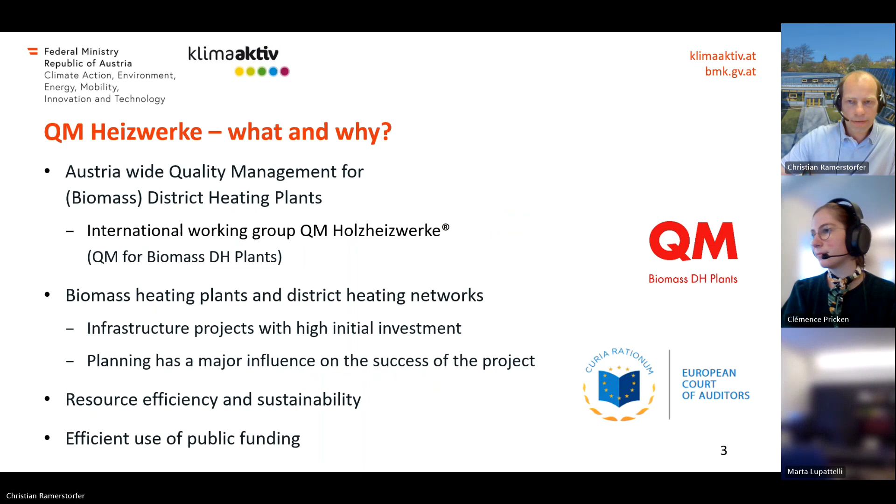So you prefer that we change the slides or that you do them yourselves? Yeah, if it is possible, I would do it myself. Mhm. Good morning. Hello. Good morning. Should we have a try on that? Yeah, sure. If you wanna try to share your screen. Yeah, should be no problem. So now it is in full screen and working, huh? And presentation mode, next slide. Indeed. Yes. Everything okay? Okay. Indeed.

Yeah, then I think it's more efficient to do it this way because there are a lot of slides and hopefully I can keep time, but yeah, let's see. Thank you very much.

So we are only two today, Christian Holter and I. Yes, because while we were organizing this session, we realized that having such a focus on heat pumps, maybe it would have been better, for the sake of completeness and organization, to organize a second session, like 2.2 on heat pumps as a case study. Okay. Yeah, it's okay for me, of course. Would you like to take part in this session 2.2 as well? So we can send you the invite. Exactly.

Yeah, why not? When is this going to be? We have to decide between two dates. It's either the 30th of November or the 21st of December. But I think we will go for the 30th of November. Yeah, would be possible. Please forward the appointment to me, and I will have a look if it is possible. Definitely interesting, of course, also for us because we are also dealing more and more with heat pumps.

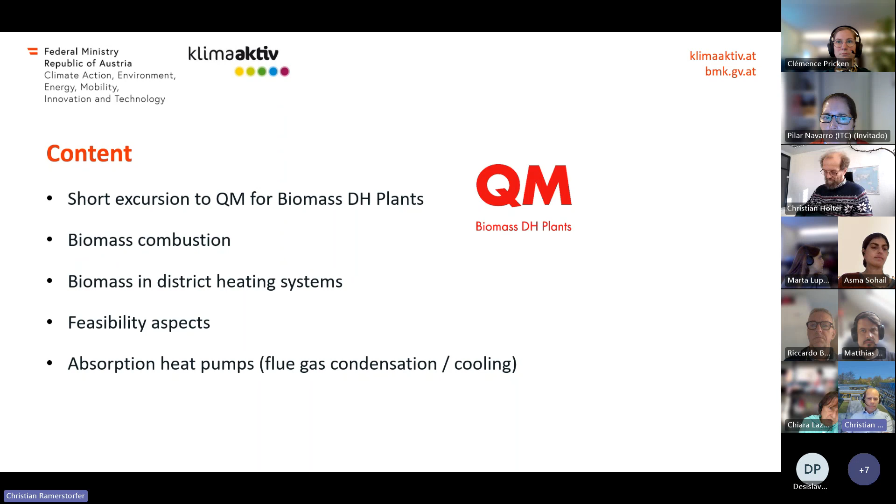So, this short excursion to QM. What is this? In Austria we have QM Heizwerke. This is an Austrian-wide quality management for district heating plants under the umbrella of an international working group called QM Holzheizwerke, or in English QM for biomass DH plants, which deals with biomass heating plants and district heating networks. It was designed because biomass heating plants are infrastructure projects with very high initial investment, and planning has a major influence on the success of such a project. Some mistakes were made in the past, and QM tries to ensure resource efficiency and sustainability, and last but not least, efficient use of public funding if public money goes into such projects.

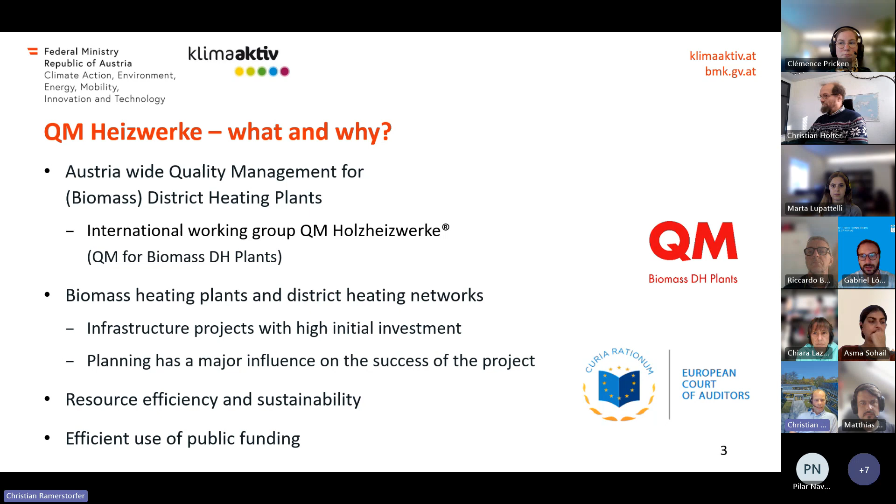So who invented this? It was initially made in Switzerland since 1998. Since 2005 it is also done in Austria and Germany, in Austria by this Klimaaktiv program Heizwerke und Wärmenetze. Since 2016 it is managed by our institute. And one success of this Interreg Central Europe project N-Train is the participation of Italy since 2020 in this international working group.

The most important literature within this publication series, which I will refer to a lot in the presentation, is the QM Planning Handbook, now available in a third completely revised edition from 2022, so really new. For the district heating network itself, there's also a handbook on planning of district heating networks from Verenum in Switzerland, which the planning handbook often refers to. On the technical side, for hydraulics and control, there are the standard hydraulic schemes or standard hydraulic solutions, another document dealing with that topic. I will come to the planning handbook a lot afterwards, so enough about that for now.

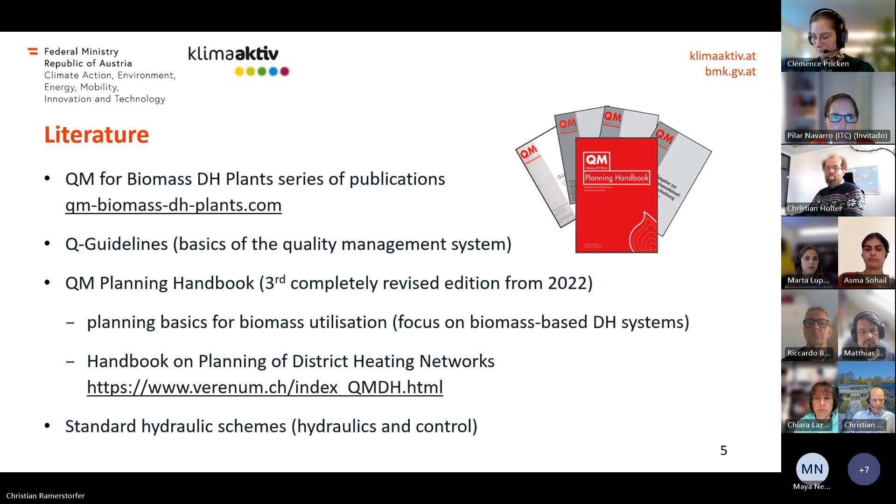What is also important to consider is that sometimes instead of the water content, the moisture content is given, which has considerably different values. Water content is on a wet base, moisture content is on a dry base. So be careful which of these two values is really given.

Another very important thing is that the combustion system or the firing system always has to match the biomass type or also the quality of biomass that should be used. So different types of biomass need different types of firing systems.

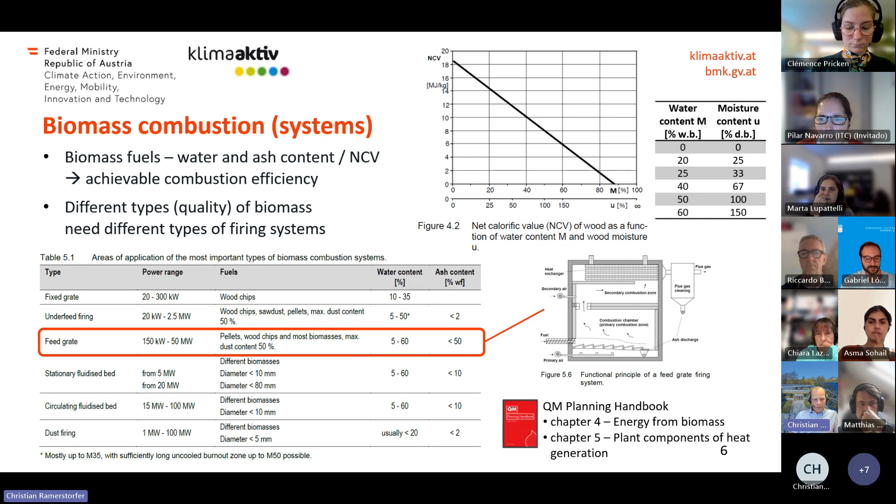Whereas for district heating systems, there's not only this boiler system, but also the district heating network, of course, and this turns out to be a multiplication in efficiency. So if we have 85% annual efficiency of the biomass boiler and 90% for the district heating network, which would be target values according to the QM system, then we see that the overall annual efficiency of such a district heating system is 76.5%, so considerably lower than decentralized boilers.

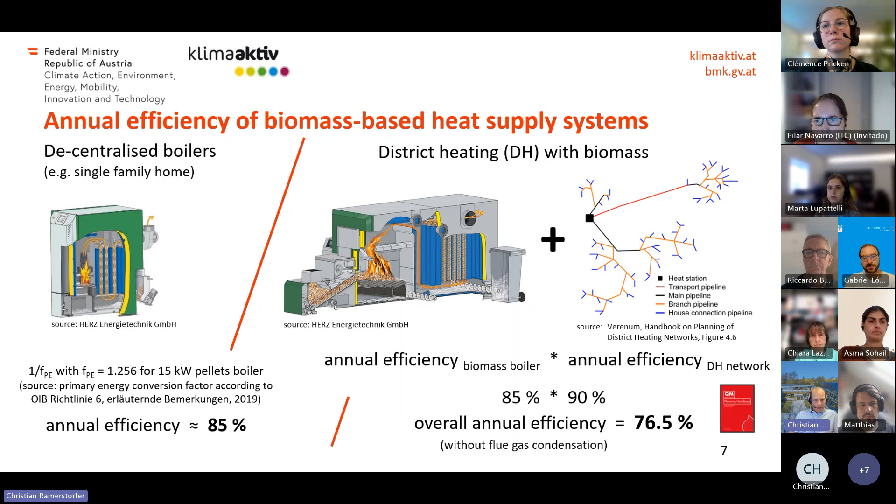Of course, for a boiler that has no flue gas condensation. But in the first step, one could ask, why should we do district heating then? There are reasons, of course. One argument is often customer convenience, so low space requirement, for example, and being carefree for the customers. But of course, there are also other very important arguments. So flexibility and resilience is a very important topic here.

It enables waste heat utilization on a large scale, also for single family homes and so on, which cannot be done with another technology than district heating. It also enables integrating other renewable energy sources like solar thermal and geothermal. About solar thermal, we will surely hear something in the next presentation.

And especially for biomass, there are a lot of advantages to doing this via a district heating system. First of all, it enables it to be locally emission free at the customers, so only emissions at the central heating plant, and there with monitored emissions. Then it is possible to have reduced start-stop and low-load operation of the boiler due to a better distribution of the heat demand in the network, so simultaneity of the heat demand.

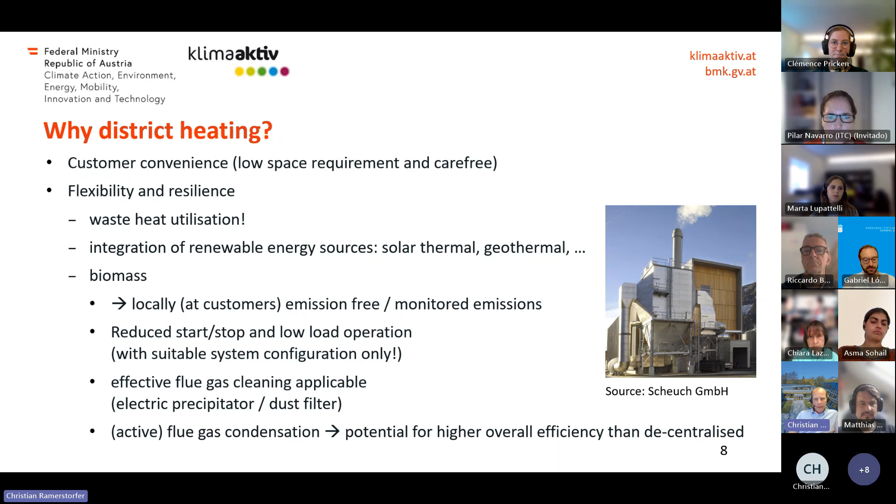Then effective flue gas cleaning is applicable, for instance an electrostatic precipitator, as you see in the picture here. And it also enables integrating flue gas condensation or even active flue gas condensation. I will come back to that later. This gives the potential for a higher overall efficiency than these decentralized boilers. So a lot of arguments to do it via district heating, but of course there are special needs for such systems.

Biomass heating plants are very complex systems. Not only heat pumps, I would say, are complex, but biomass heating plants are also rather complex. And biomass boilers have very different needs than, for instance, natural gas or oil boilers. There's a considerably increased space demand for all the additional components needed, especially for fuel handling and storage, the firing in the boiler itself, the ash system, and so on. So one has to consider that.

Then there is also an increased complexity of hydraulics and control, and also of the safety equipment needed. There has to be a boiler return temperature protection. Control of the firing and boiler is maybe more challenging than for a natural gas boiler. You have to think about how to control the boiler; QM says here, according to the charging state of the heat storage tank. These are topics shown in these hydraulic solutions, things like thermal discharge, safety devices, and so on.

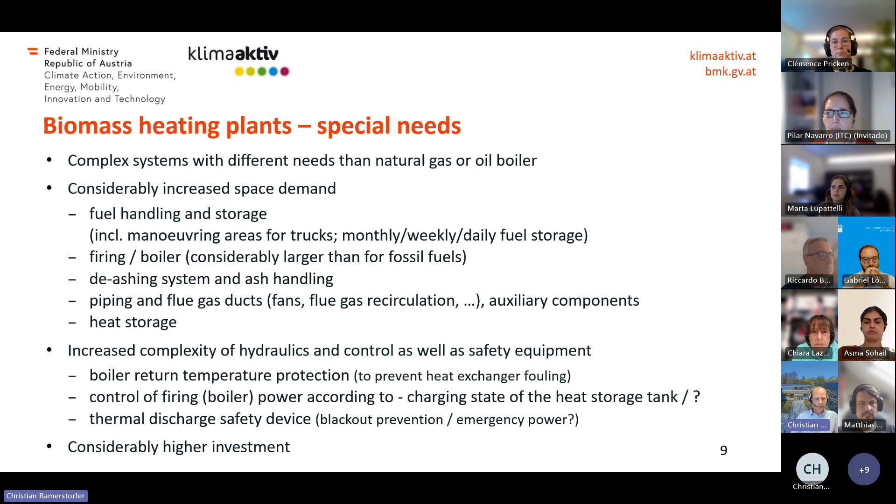So all in all, all these increased demands also lead to a considerably higher investment, but more on feasibility later on. So how does this look? A basic biomass plant configuration you can see here. You have this fuel storage, a push floor in this case, which is, as you see from the space requirements and conditions here, really different from a fossil fuel based plant.

Then there's the firing and the heat exchanger or boiler itself. Most commonly we talk about the boiler for this whole unit, so firing and heat exchanger is the boiler.

Then there's also a first step of flue gas cleaning already included in this boiler. It's really standard to have this multi-cyclone in there. Maybe a second step, electrostatic precipitator or baghouse filter for flue gas cleaning, the chimney.

All this ash conveying container system, control cabinets, of course. Also a heat storage, which is always recommended by QM to have in combination with the biomass boiler. And a lot of components that are not shown here, like hydraulics, pumps, fans, and so on. So you see, it's really complex and more is needed than for natural gas boilers, for instance.

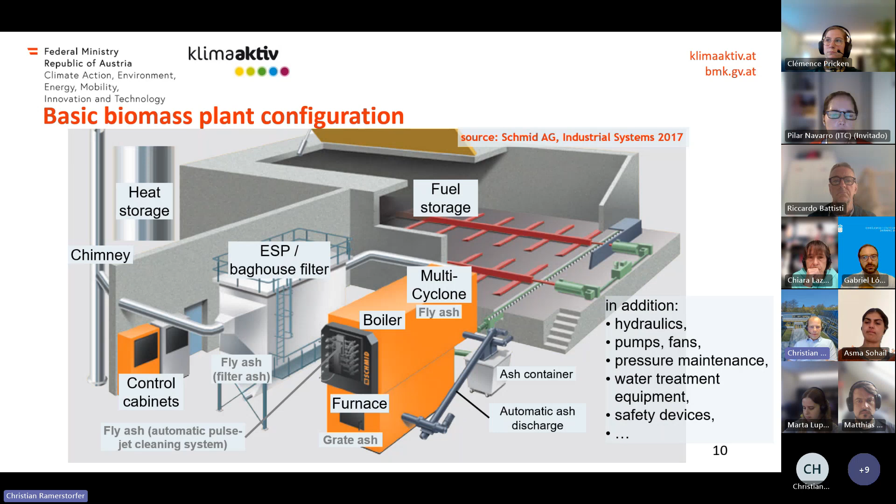So if you want to design that, I tried to sum up some principles according to this quality management system that should ensure low emissions and at the same time efficient and feasible operation if you follow these principles. So QM says most important is to have a matching firing technology to the fuel quality, as already said, and a really profound planning basis for design.

So you have to be sure to know the actual situation of the total heat demand or heat output demand, and to design the whole plant to these needs. So to have a very clear picture of the overall concept, how the plant and the boiler should be dimensioned, with hydraulics and control viewed as one unit. You cannot design a control system without knowing the hydraulics and vice versa. So it's very important. And as I already said, a heat storage tank is really recommended.

There are also some very basic target values here, what should be reached. The target is to reach a high utilization of the biomass boiler, or boilers if there are more of them in the system, of about 2,000 to 4,000 full load operating hours per year, depending on the plant configuration. Then an annual efficiency of the biomass boiler of at least 85% and maximum network losses of 10%. These were the values shown before with this

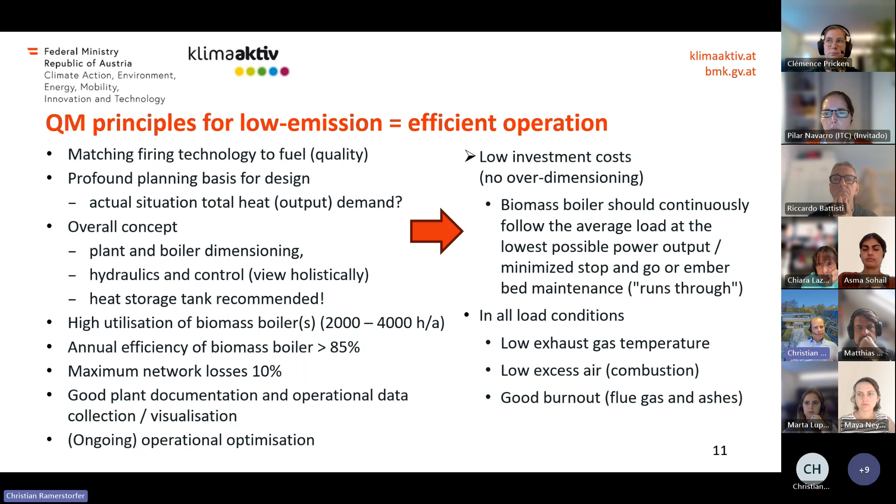Very important is to have no over-dimensioning of the boiler. So biomass boilers should continuously follow the average load at the lowest possible power output. And in all load conditions, low exhaust gas temperature, low excess air for combustion, and a good burnout. So these are some of the basic principles. A lot of criteria in detail is given in the planning handbook.

One point I would like to point out here is this low load condition, which says that the boiler output should not get lower than a certain percentage according to this table here, depending on the grate or firing type used and the water content of the fuel, which represents the fuel quality. So for instance, for a combination with fire bed maintenance and water content of 35 to 50%, it should not go below 20% of the nominal boiler output in order to prevent stop and go and ember bed maintenance operation connected with high emissions. So this is a very important criterion you have to consider for boiler design.

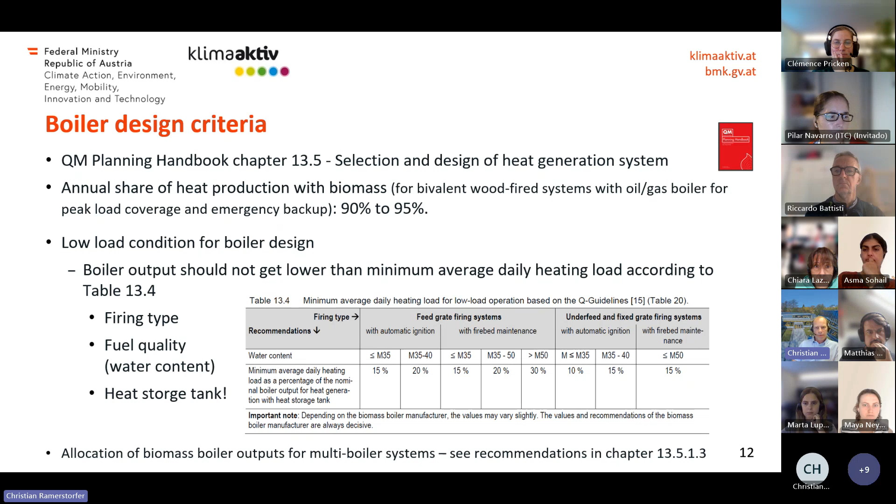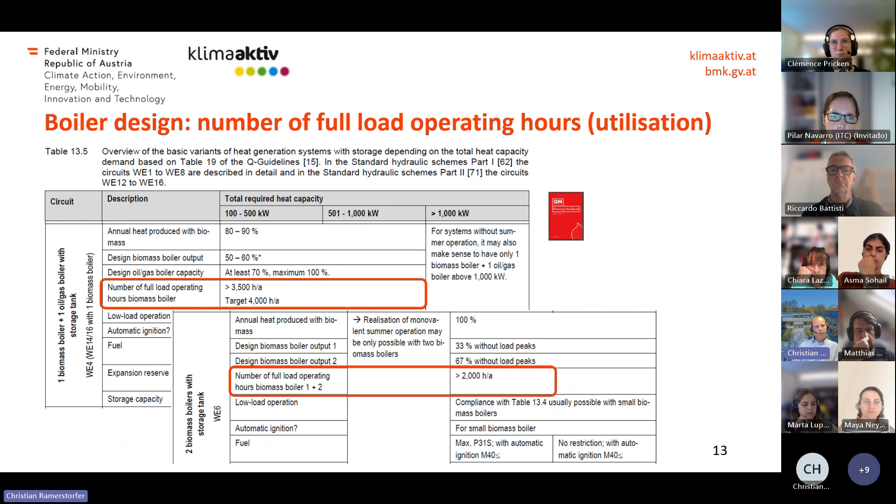There are a lot more criteria given in this planning handbook. I will not go into more detail. Just here two tables according to the system setup, as I said, with the full load operating hours that should be reached. So for a single biomass boiler with one peak load boiler on fossil fuels and the storage tanks, you can see here more than 3,500 hours, or the target would be even 4,000 hours per year. So this is really a rather high value.

So how to design this? It's very important to have reliable databases to do that, and to have a clear picture of what the load profile over a year looks like. So in this example here, you can see this red line showing the daily mean values of district heating network heat demand over one year, and then how all these heat supply technologies work together. So there are two biomass boilers in this example, also a solar thermal plant and a natural gas peak load boiler.

And as you can see here, there are these two biomass boilers with the nominal load output indicated here that are designed with equal nominal heat output.

Could also be done in another way, but you have to think when to use boiler 1 and when to use boiler 1 and 2. So in winter, both of them. In transition period, only biomass boiler 1. In summertime, coverage by solar thermal.

And then in this example, of course, you have to think about where this minimum or low load condition is occurring. So of course in transition period for this biomass boiler 1 here, is this fulfilled, that boiler 1 doesn't have to operate below this limit?

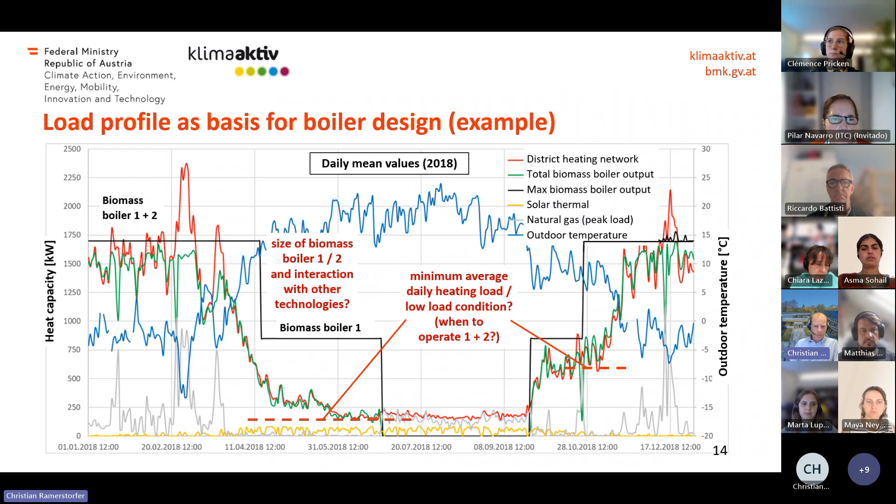Christian, sorry, you have 3 minutes left. Yeah. Okay. Thanks. I'll try to get the main points through to the end. So

A short look only on investment issues. So there is also an indication of investment costs for the heat generation system in the planning handbook, but be careful with that. Local framework conditions have to be considered, local prices, inflation, and so on. So what you see here are two boundaries for upper and lower investment costs for the heating system or the biomass plant.

And what you also can see is that, for instance, between Austria and Switzerland, there's already a big difference, a factor of 2, just due to prices and local framework conditions. And then of course consider that the costs are total annual costs, so not only capital but also fuel and energy is a very important part for biomass plants. As you see from these examples, for some variants more than half of the annual costs is fuel costs. So investment alone is not all regarding feasibility.

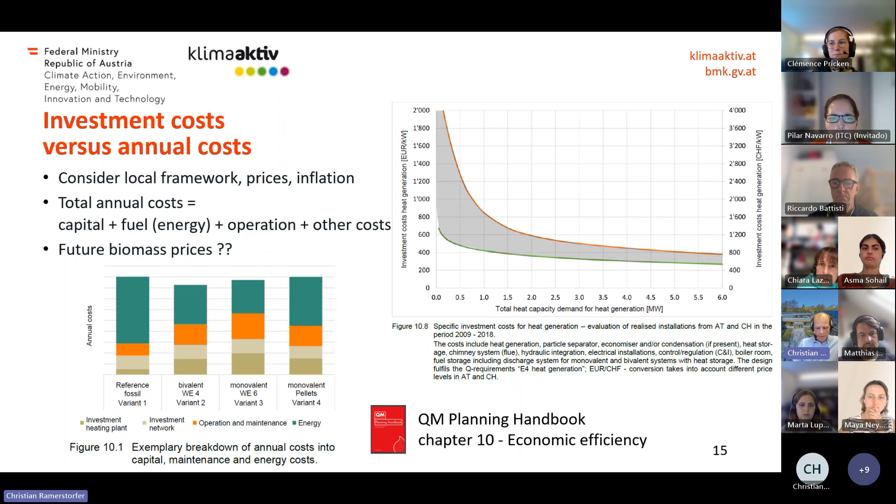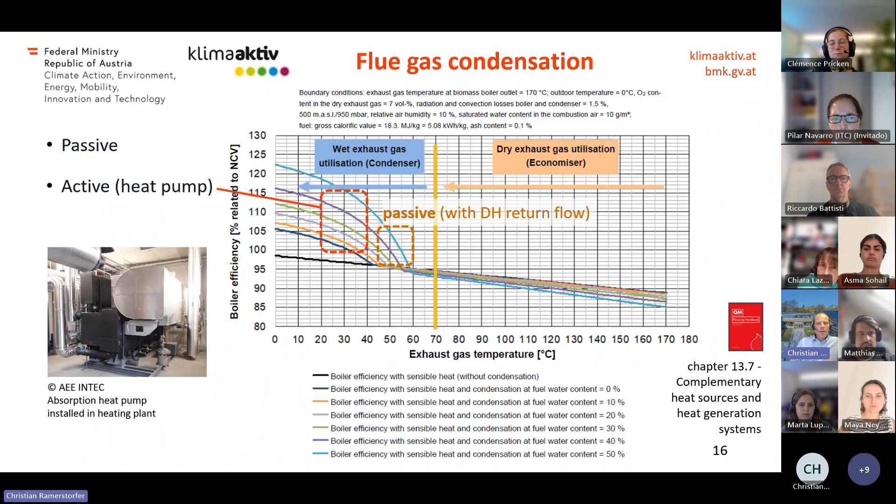And these absorption heat pumps really offer interesting options. They are thermally driven. So with a part of the boiler output from the biomass boiler, a heat pump is operated that produces cold water, let's say, and then heat output on the supply side.

And with this cold water, you can do flue gas condensation, as in this example here, there would be an absorption heat pump instead of this compression heat pump in here, doing a second step of flue gas condensation or flue gas condensation at all. So with the potential to have really higher efficiency than decentralized systems, as mentioned in the beginning.

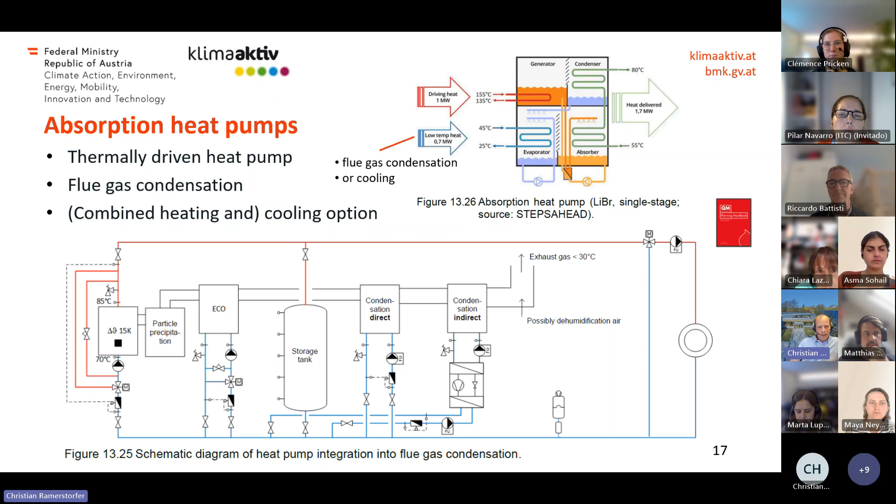But these heat pumps also enable cooling from biomass. So you drive a heat pump with heat from biomass that is then producing cold water for cooling. And of course, in terms of efficiency, it would be again best if this could be done combined. So combined heating and cooling would be really an interesting option from biomass, because then you have 2 useful outputs, the cold water for cooling and the heating to the district heating network. So yeah, very short about that.

So that's already all I want to give you in this short time. I think I have mentioned all of that. One time again, a reference to this QM planning handbook, which is really a comprehensive and reliable information source.

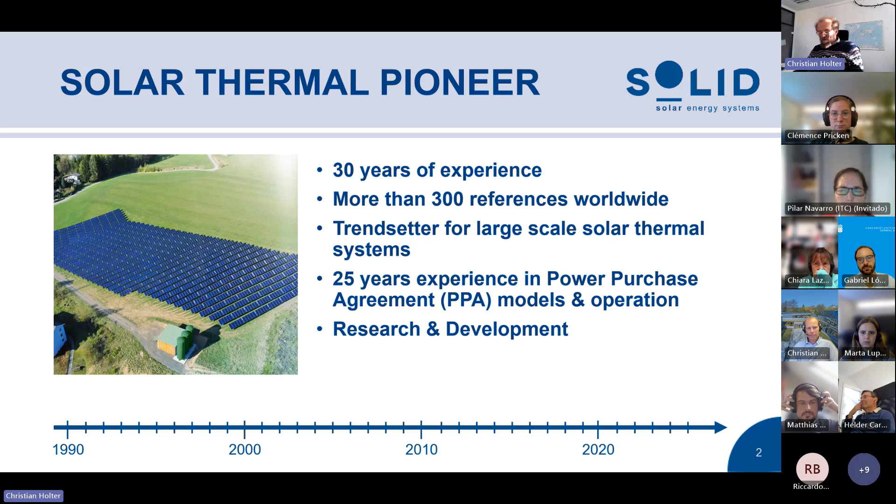On the business side, we have learned it's not only about technology, it's not only about knowing how to do things, but you need to offer the right business models. So we have now 25 years experience as well in owning and operating such systems through power purchase agreements, or in our case, actually, we better should say heat purchase agreements. And besides that, we do a lot of R&D to move on the technology and improve things.

Just as a general slide about solar heat, solar hot water, what are the typical applications we are looking on today? You are perfectly aware, I guess, about the residential thing, making hot water, making some space heating. That is where solar heat came from originally. That was the market established 30 years back. But in the last decade, solar heat moved into many other things, and I'm going to focus today only on the district heating. Nevertheless, I want to mention industry.

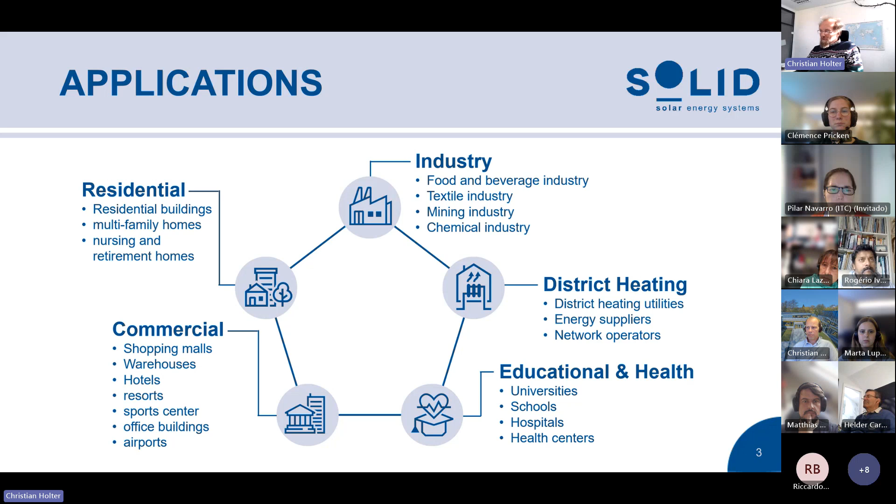There's a lot of potential if you have involvement in food, beverage, textile, mining, chemical industry. There's a lot of processes up to 100 degrees C where solar heat can provide quite nice solutions. As well in commercial sectors, here we go for providing both heating and air conditioning, cooling in shopping malls, hotels, resorts, hospitals, etc. And that covers actually as well the education health sector. Today, our focus here is district heat, where we see on the right side.

Now, district heat has a lot of challenges at the moment, and we have a big conversion in the district heat. The supply structure is in a big change. In the past, that was a fossil-dominated energy sourcing mostly. Today, we need to shift in decarbonized renewables. In the past, it was very typical one central power or heating plant providing the heat. Today, many systems actually have multivalent sources. They need to integrate all types of waste heat, of renewables, of volatile energy, of storages. So there's a big change as well in the technical design and operation of such systems.

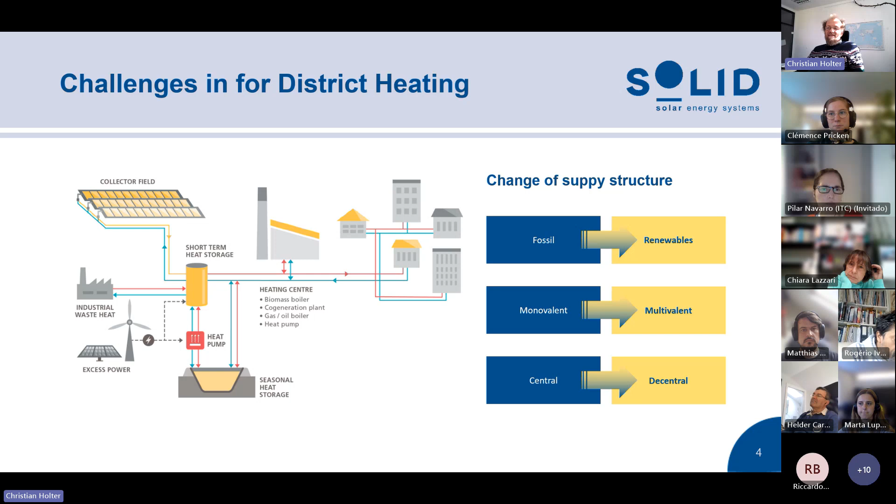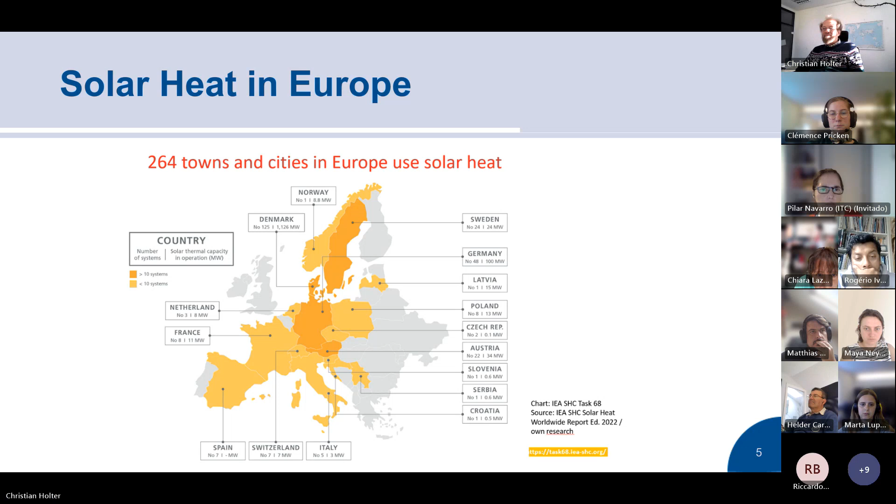Now, getting back to the old days of that, it started in Austria, and I was personally part of that, roughly 30 years back in rather small systems. It was biomass systems, exactly the one Christian was talking about, who said we don't want to operate our boilers in summer because this low load operation doesn't make any sense. Can you help us out here with solar?

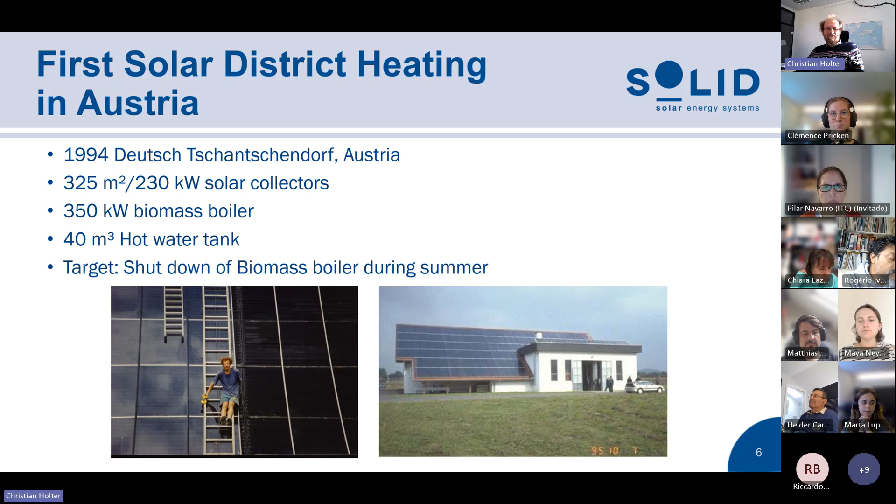So it was systems around 200, 300 kW max power, supplying here in combination with a storage tank the summer energy. And the target here was avoiding a part load operation, extremely low load operation of the biomass boiler, saving here the work of O&M, saving here inefficient operation mode. That was really the starting point in Austria. In Europe, we already had at the time Sweden leading the market, having several big projects, and we were quite lucky getting here a lot of initial know-how out of that.

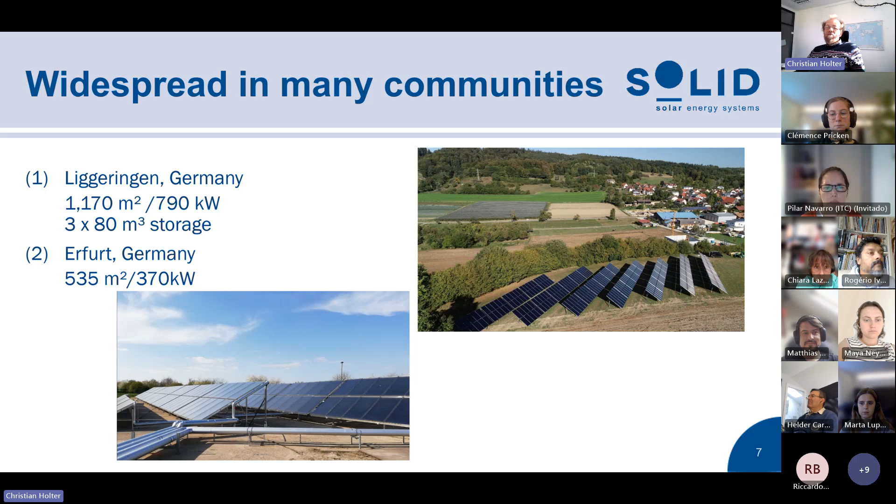Now, just traveling a little bit to countries, so some systems in Germany, something like 3 to 8 years old, still in the range of a few hundred kW. Actually, most of them here go for ground-mounted, as you can see. Moving now to Latvia, so even the Eastern European countries have been catching up here and used solar heat as part of their decarbonization strategy.

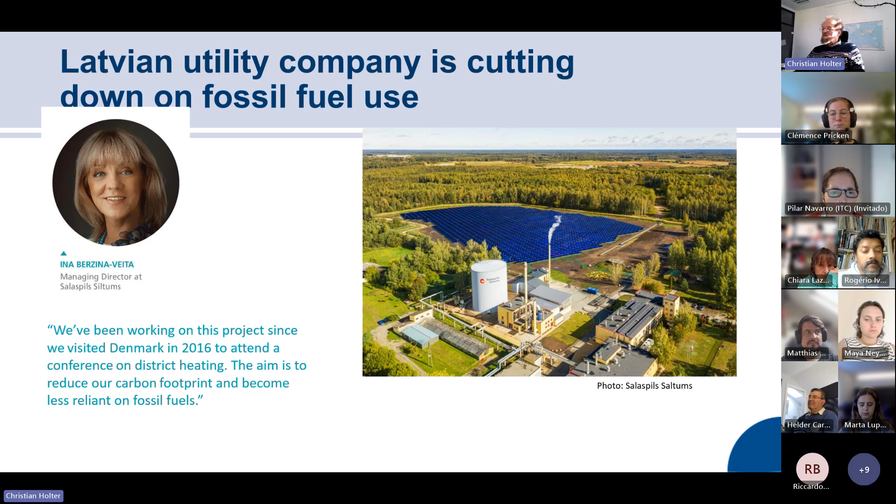So this is a wide scale from the first, let's say, mini project to the biggest one that has been built. And all of them here have the same concept. They take care of the summer supply to avoid fuel and boiler operation. So you have in principle the sun heating up the hot water in the solar collectors. You put it in a storage, which is a kind of day storage, and then you supply it to the villages and the cities.

Some typical demands and key numbers on that. A little bit depending on the climate, if you're more southern or northern, you can take care of something like 10 to 15% of the city's heat demand with a concept like that. For producing 1 gigawatt hour of usable heat, you need around 2,000 square meters of collector. Storage is quite moderate in size, and heat costs are typically around 60 to 85 euro per megawatt hour. But this is just a small starting point, and solar can do a lot more.

So we move now to the next level of development here. If you oversize the solar plant, you have a big challenge. You produce surplus in the summer months, which seems to be difficult to use because you do not have any instantaneous demand for this energy. So what you can do is build a huge seasonal heat storage to shift the solar energy to be used in the autumn, in the shoulder seasons, or even in the winter months.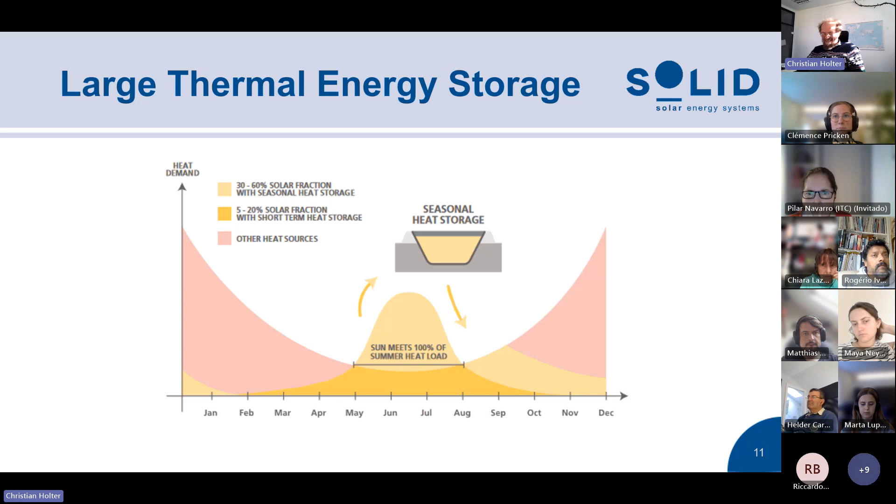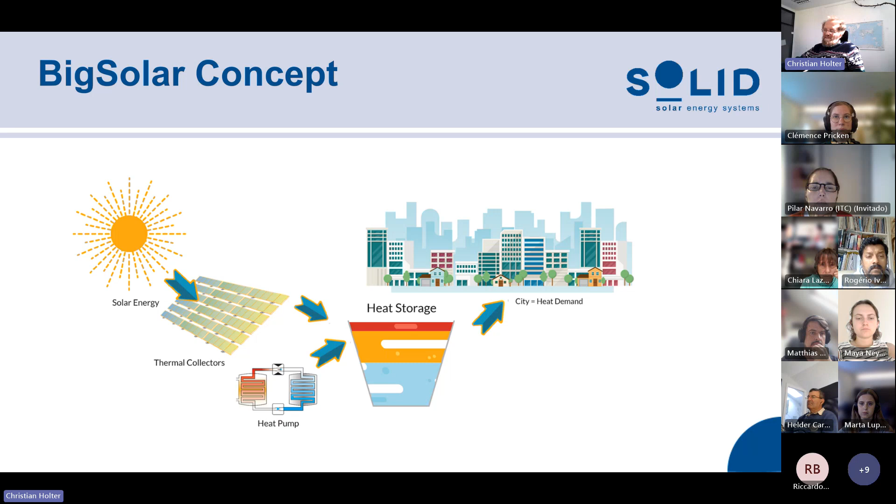And that concept is not a brand new concept either. It really started 30 years back in very small systems. I can tell you, I live in a house which has used that concept for 30 years, and it's still nicely working. But putting this in operation in municipal style and scale is a different challenge. So that is much more than just a solar system. You have the collectors in an extended area. You probably have a heat pump to extract low-grade heat from the storage as well. You have a huge heat storage, and then you supply it to the city.

And the most challenging system I have seen is sitting in Tibet, in Langkazi, 4,000 meters above sea level. The challenge there was that previously the community was using dung from the animals to heat their houses. Population increased. People wanted better living standards, wanted more temperature in the buildings. So they ran out of natural resources. And in Tibet, you don't have any biomass growing. You have no local coal, oil, gas, whatever. You need to transport everything a long way, really thousands of kilometers over high mountain passes.

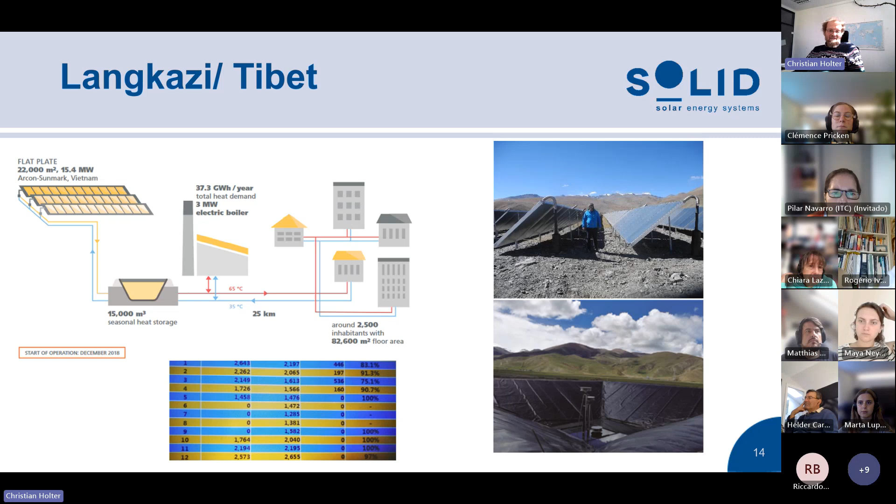Now, this is Tibet, this is far away, but I'm currently involved in a study of the European Investment Bank and EBRD for Kosovo, and we studied there 9 cities to move them from decentral electric heating, which is state of the art today, to any type of sustainable heating.

And getting a little bit back here to a question that was launched at the end of the previous session, the only way to make here a central decarbonized system is having a central heat system. So it's not only about the costs, it is as well, if you want to decarbonize a whole city and you want to do that on the basis of individual houses, you get lost as you have so many specific cases to solve individually.

And the study for Kosovo, which is at the very last stage, we did here for the city of Ferizaj. We talk here about a total heat demand of around 100 gigawatt hours with a peak load of 60 megawatt demand. And we have there lack of biomass. The biomass available in the country is not sufficient to support the district heating. We have investigated sources of waste heat, not available. We have checked out geothermal, well, in a small percentage available here. So we ended up saying we have nothing else but the sun.

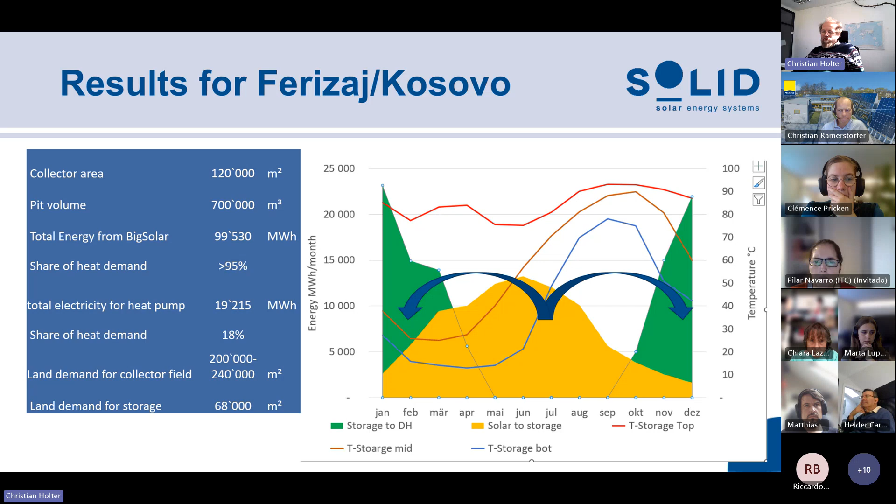So compared to the first system, when we mitigate the winter supply with seasonal storage and solar, we need to extend the solar system, and it's actually quite linear. So before we had 10 to 15% solar heat in the system. If you want to have 30%, we need to double the solar array. If you want to have 60%, we need to quadruple it. If you want to have 90%, it means a factor of 6. Yes, it's not perfectly linear in real life, but as a first assumption, that helps you. Solar collectors give roughly the same output.

Now, on the storage, it's clear we need a multiple of the volume, and this is why we need to change here the way of building that. The costs of heat are higher because for sure the storage doesn't come for free, and the storage has some energy losses as well. We see these big storages have something between 6 and 10% heat losses in the scale we are talking here.

And here the real focus is to take care of the pain for district heating, the peak load in winter. And as you can imagine, it's quite easy. If you have a hot water storage, you can draw any peak power out of it. Your only limitation is the size of the pipe. And it's not a boiler or other mechanical equipment giving you limitations.

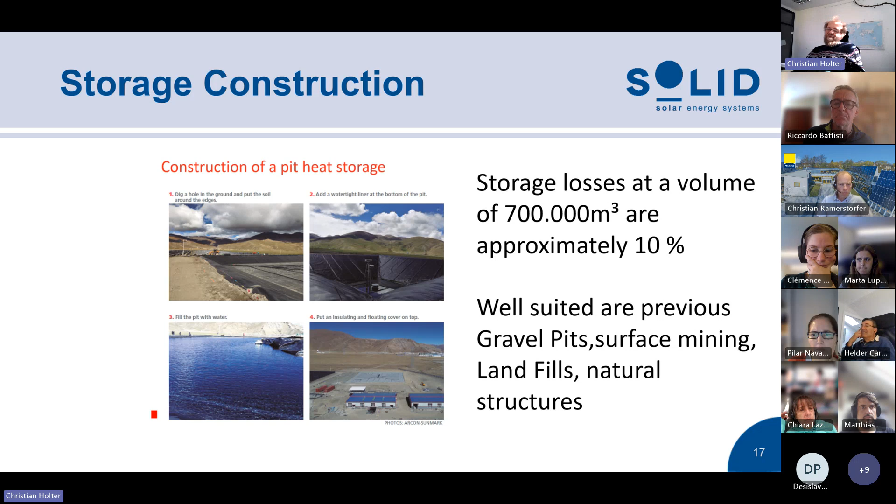We do have other projects for big cities where we have old quarries where previously basalt has been extracted. And so if you have availability here of some structures which are already sitting there, former gravel pits, etc., it's very good to take advantage of those, because then the social acceptance and as well the availability of the ground makes everything a lot easier to implement. And if there's nothing, okay, then we have technical solutions to take care of that.

I do know from some Austrian district heating companies quite recently, when they make the full calculation, saying what are my fuel costs, what are my transport costs, what are my carbon costs, what is my boiler efficiency on top of that, they say actually it's a little bit above 100 euro just currently as we talk. If you do heat by electricity, the carbon footprint is not nice, but costs are extremely higher. For sure, that's very volatile.

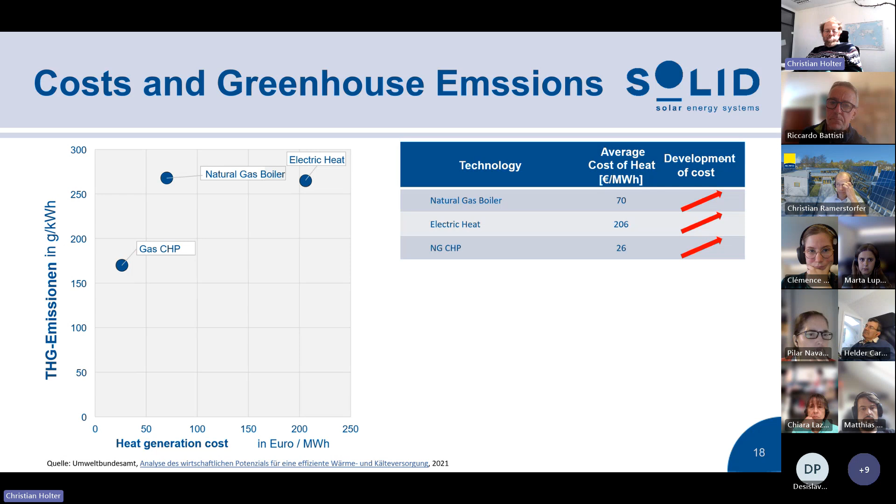If you go to gas-driven cogeneration plants, usually heat is cheaper, but the challenge is these gas cogeneration plants do not have, at least in Central Europe, the operating hours anymore needed for operating efficiently. And when you run them heat-driven, the cost structure is totally different. A heat pump based on waste heat is for sure lower cost than electric heat, so there you have a reasonable COP. Biomass, well, Christian has maybe the better numbers here, but I think we have a similar range here.

Waste heat incinerators, industrial waste heat, geothermal, and finally, when you come down to solar, without seasonal storage and with seasonal storage, when you do the numbers here, you're clearly in a very favorable scaling.

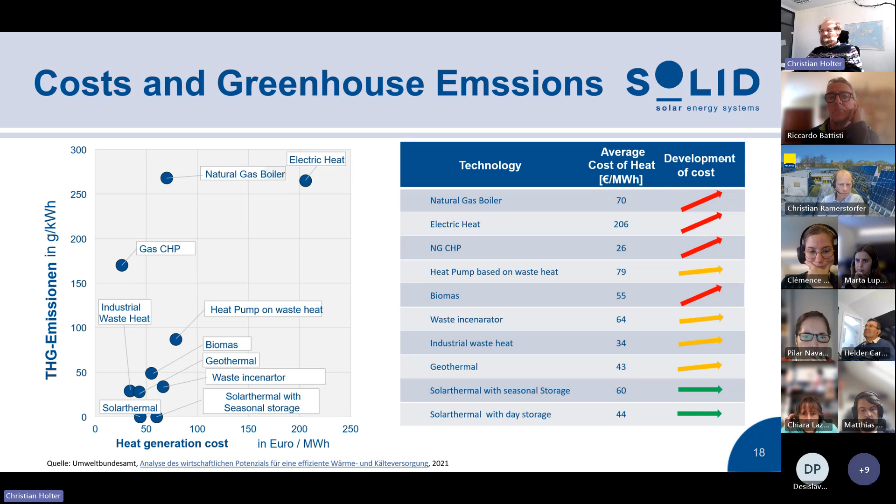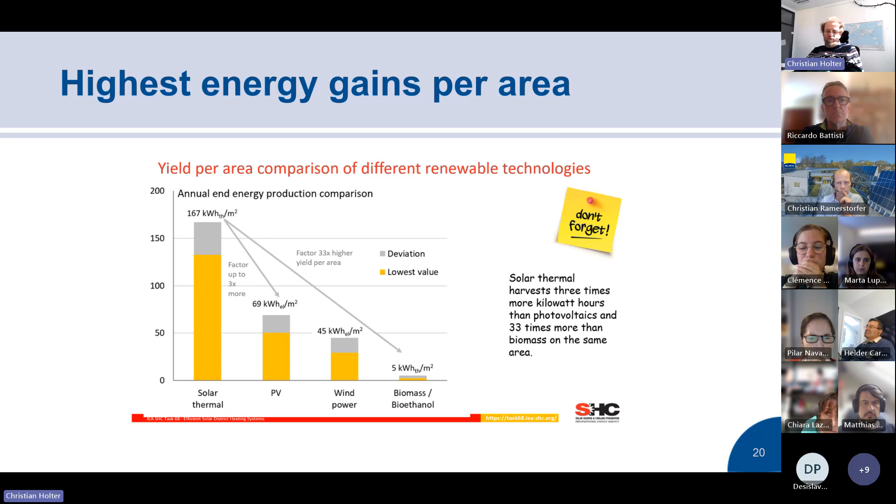Then people say, okay, we lose this area to technology. It's not a natural area anymore. Well, when you have ground-mounted collectors, we aim not to put any unremovable parts there. The areas are minimally serviced because this is cost. So typically you need to cut the grass twice a year, or you have some sheep in between. And if you keep an open space, our web supervision camera suddenly shows some deer

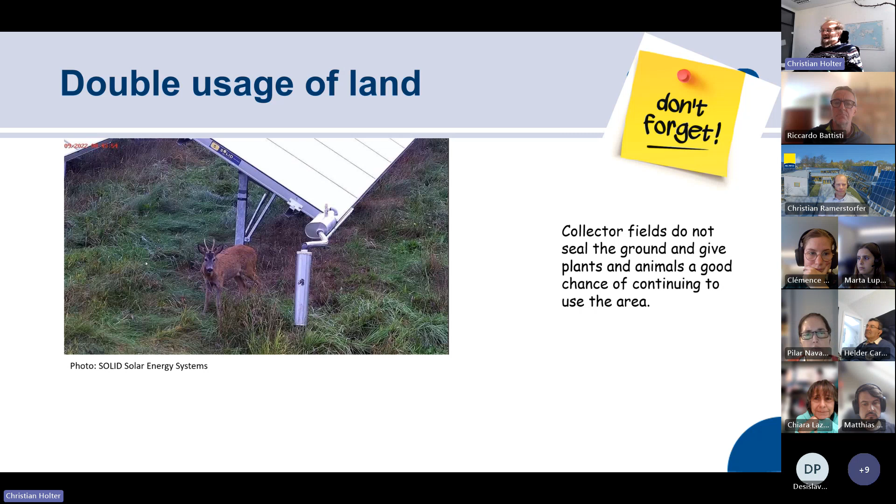sitting under the collector. And the funny part is, even when you have a strong hailstorm, you see the animals sleeping under these collectors and being happy to have some protection. But as well, you find bees, you find butterflies, you find flowers. So it's still a high biological value area when you work like that.

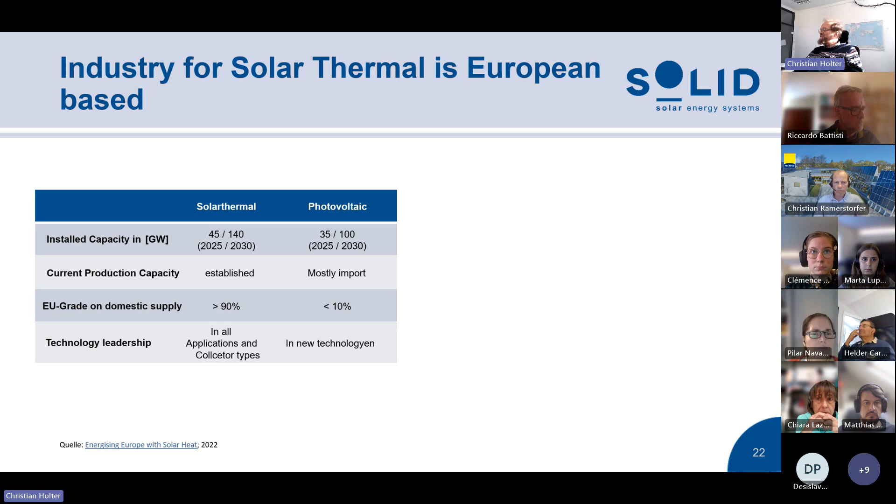Last, smart cities use solar heat. As a summary, it helps to meet the climate targets. It increases energy security, especially if you have seasonal storage and a high solar fraction. It keeps the heat price affordable. Once a system is sitting here, you have your known unit costs, you have very low operation costs, you have no exposure to whatever happens on the world market and in world policy.

And when these systems are built, you create local jobs. It helps to create European value as well. So there are a lot of good arguments we can use here for promoting solar district heating.